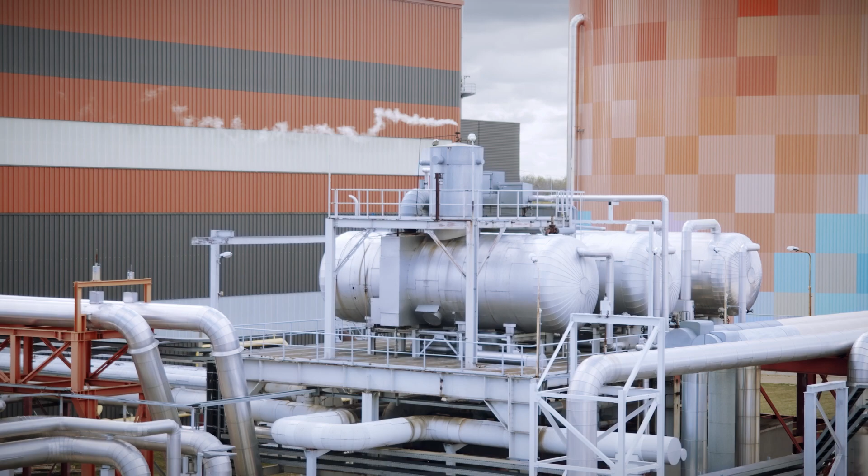Also, the regional heating system is to be provided in as sustainable a way as possible. Therefore, the company came up with the idea to provide the summer basic load of heat supply by means of a so-called innovative combined heat and power plant.

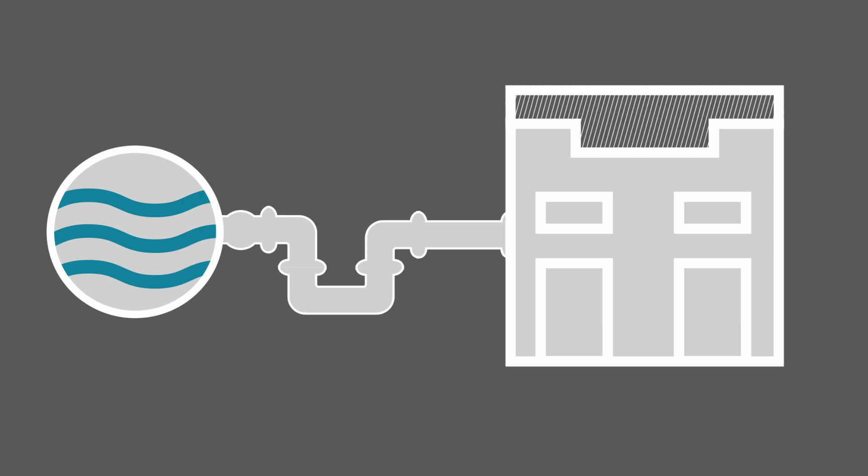The second part consists of a block heating station. This supports the regional heating system during the summer on demand. Both components are planned to be constructed near the river Saale. As soon as the plant is running, heat should be taken out of the river and conducted into the regional heating system.

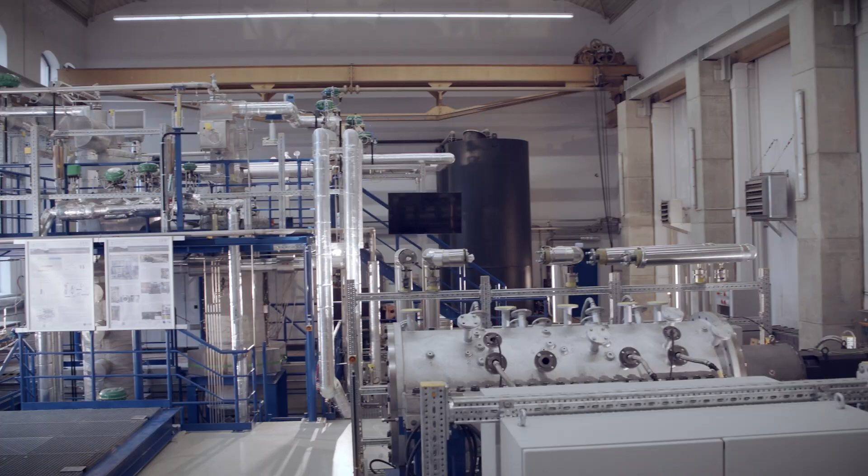During a so-called feasibility study driven by the University of Applied Sciences Zittau Görlitz, the aim was to check whether this might work. The university possesses a plant laboratory where the basic principles for such a study can be explored.

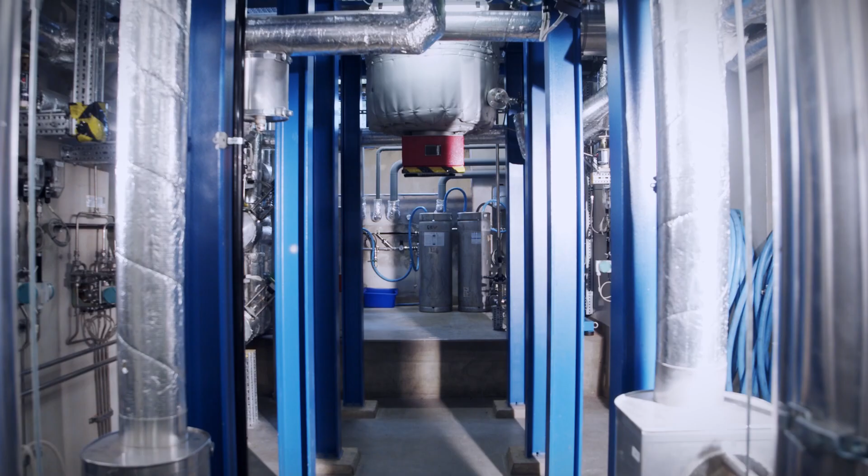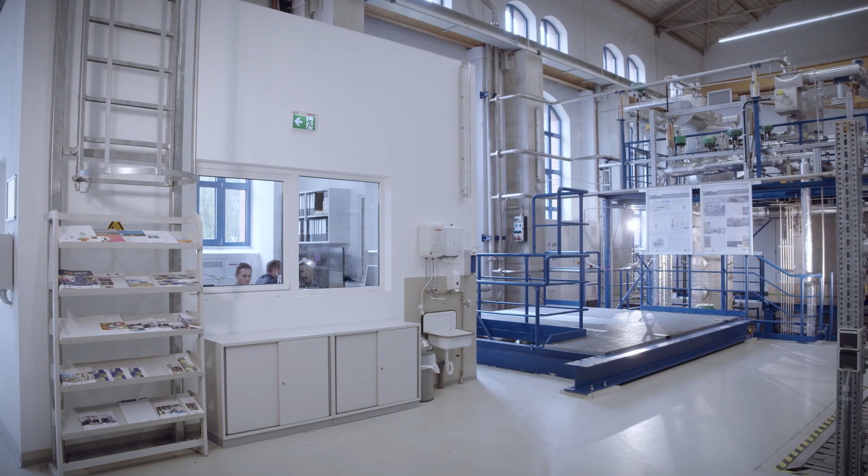The university is one of 5 universities of applied sciences in Saxony which are cooperating within the transfer network Saxony⁵. Within the co-creation lab, supply infrastructure researchers explore how the future's energy supply should be configured. Therefore, the test facility Therese was developed, amongst others.

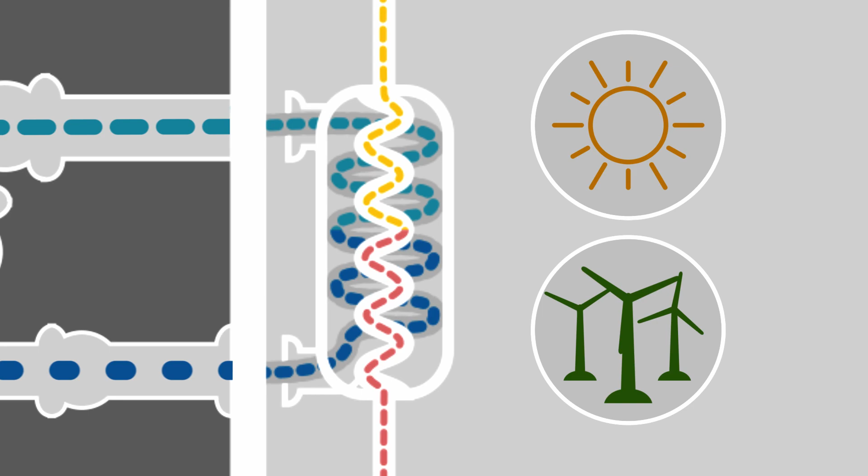First, the water from the river is directed into a heat pump. There it passes a cooling liquid, which lowers the water's temperature by 5 degrees Celsius while the cooling liquid warms up. The pump is driven by electricity from sun and wind energy and pumps the warmed liquid towards the regional heating system while compressing it.

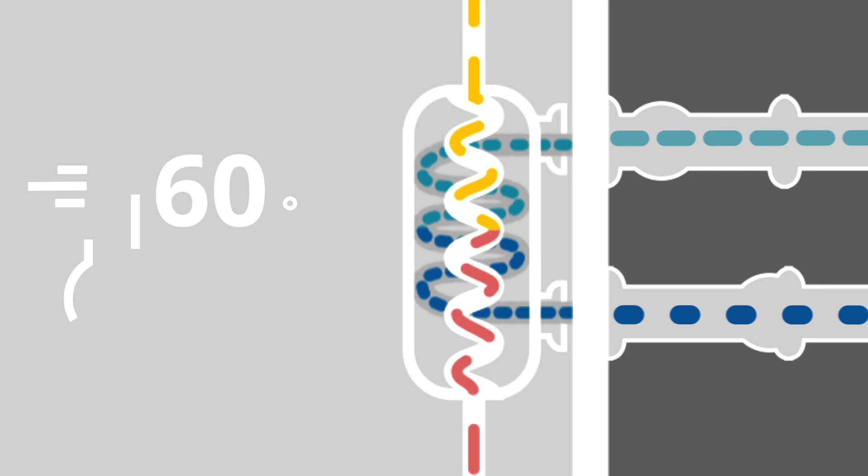The liquid passes the heat which is returning from the heating system at 60 degrees Celsius. The liquid which was heated by the water now transmits the heat into the heating system and cools down again while the temperature for the heating system rises. The heat out of the river can be transferred into the regional heating system via the heat pump.

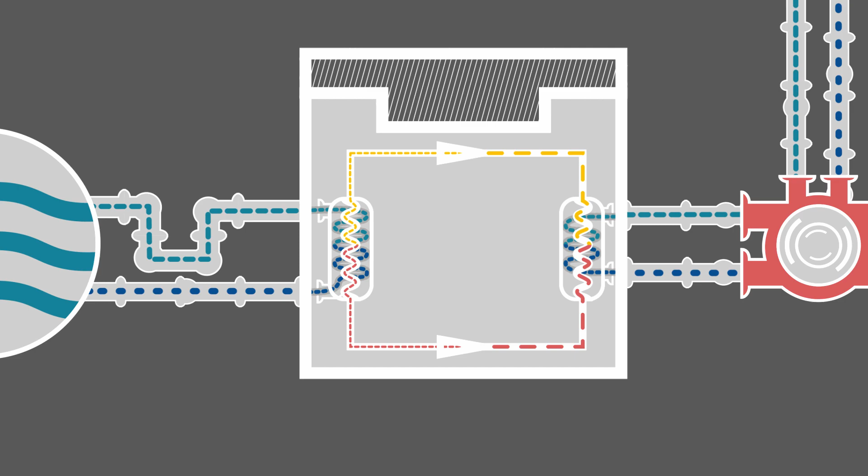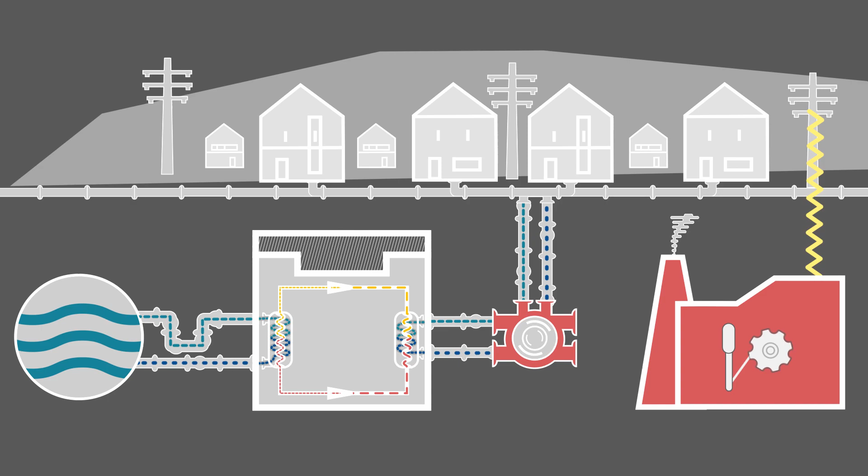During hot summer days, this is completely sufficient in order to cover the basic load, without producing carbon dioxide. During chillier days, the heat pump is supplemented by a block heating station. This contains a motor which produces electricity. The heat which is generated during that process doesn't get lost, but is instead conducted into the regional heating system.

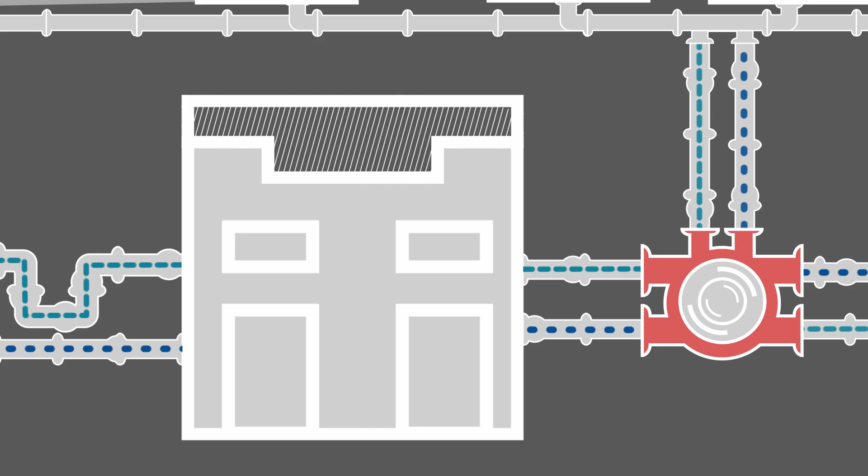In combination with the heat pump, there is now enough heat for heating units and water within the consumer's households. The environmentally friendly heat pump is able to produce 4 times more heat than the block heating station. The combined heat and power plant is to be built in Trotha in the north of Halle. Alexander Sommer is guiding the project.

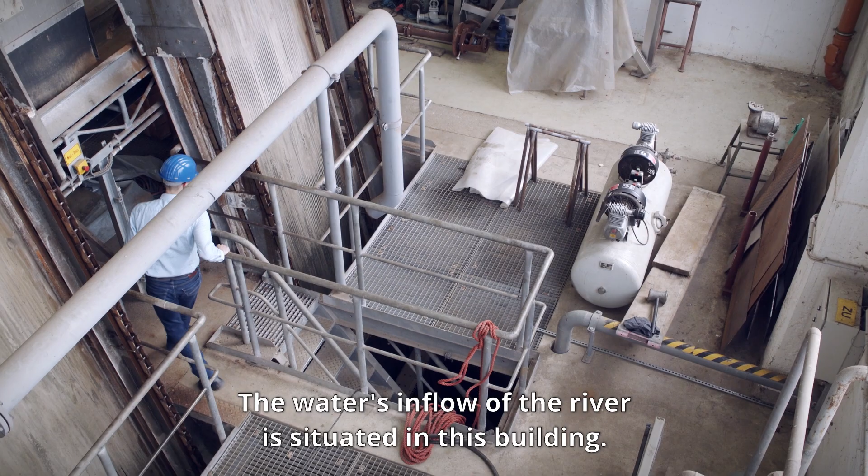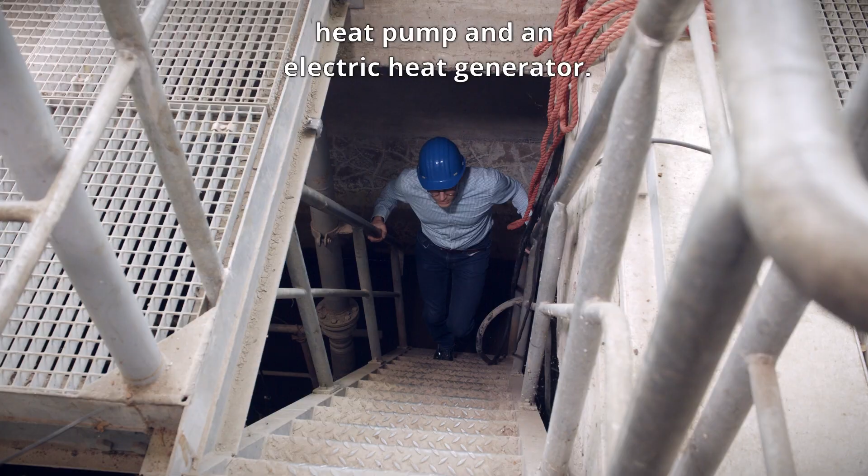The transfer of knowledge between university and EVH has been a success. Thanks to the feasibility study, the concept can turn into a secure and ecological reality, a regional heat source.